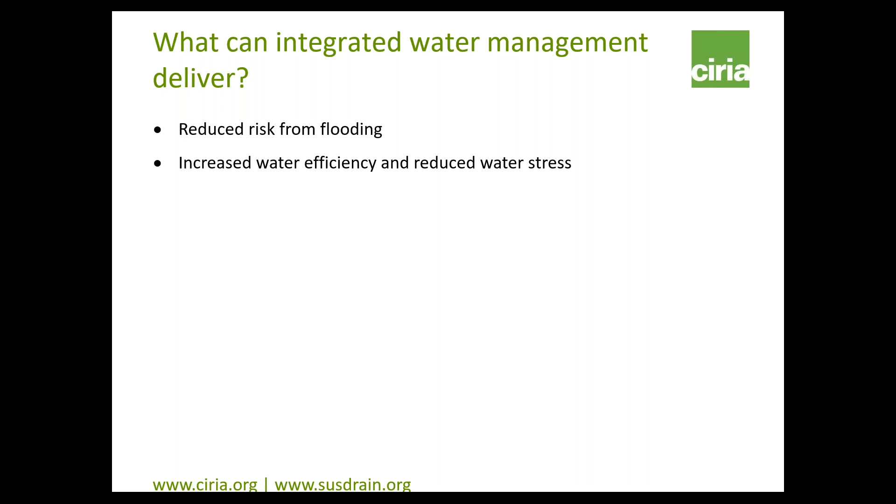It creates a clean and good quality water environment by reducing and removing pollution from surface water and providing a more natural and biodiverse water environment.

It enables new housing by providing integrated water management solutions to challenges such as flood risk, availability of water, lack of drainage capacity, and poor urban environment.

It facilitates economic growth and regeneration by improving urban environments and enabling sustainable development.

It enhances biodiversity. Integrated water management interventions can provide a more natural environment, introducing a range of habitats and species, from wetlands to wildflower meadows, at a range of scales, often in otherwise biodiversity poor urban areas.

We can create better blue-green infrastructure, providing functional and connected green space, which delivers multiple benefits and connects urban places for water, wildlife and for people.

It improves the accessibility of public spaces and places and enhances well-being, providing good quality open space which, as well as managing water, is accessible, creates more livable places, and promotes health and well-being.

Very topically, it can help us mitigate and adapt to climate change, because providing urban green space at a range of scales makes urban areas more resilient by reducing the urban heat island effect, reducing energy consumption, making better use of water, and enabling our towns and cities to better cope with more extreme weather events.

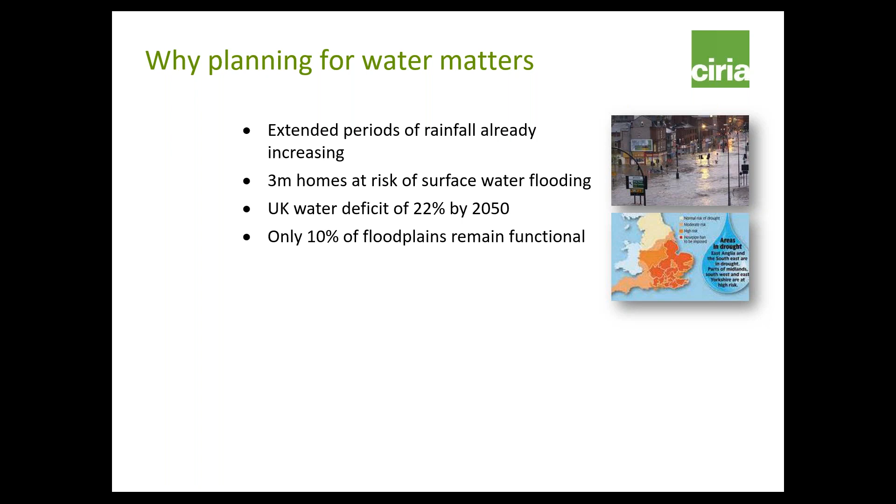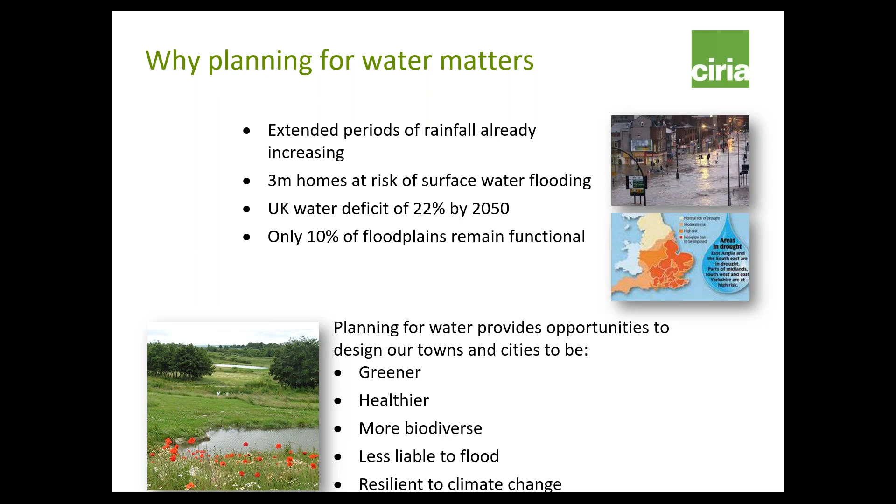It's not all doom and gloom. If we do planning for water properly, using integrated water management, we have the opportunity to design our towns and cities to be greener, healthier, more biodiverse, less liable to flood, and resilient to climate change — the 10 outcomes I mentioned before. So, how is integrated water management delivered through planning?

Planning can create blue-green infrastructure. That's the network of green space and water that permeates and connects the urban fabric to provide the elements of integrated water management and deliver the multiple benefits that it provides.

Planning can also require and facilitate sustainable drainage systems to manage surface water and collect rainwater for reuse. If planning incorporates integrated water management interventions as part of urban design and placemaking, it will provide good quality open space which, as well as managing water, is accessible and creates more livable places. This in turn attracts business and promotes economic growth.

Planning can create opportunities for rainwater harvesting and reuse to reduce demand for mains water. Incorporating integrated water management into the urban fabric creates a more pleasant and healthy environment. These measures provide recreational space and a more pleasant and healthy urban environment, promoting well-being and improved biodiversity.

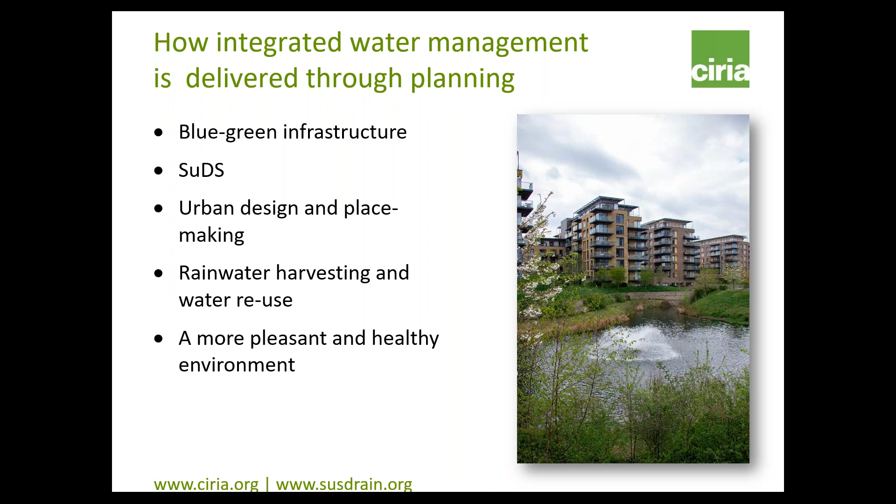I mentioned at the beginning that we identified in our research the factors which are critical to delivering successful integrated water management, and there are five of them. The first one is understanding integrated water management.

The second critical success factor is having an enabling local policy. That's clear and understandable local plan policies and clear supportive plans and strategies from the lead local flood authority and water company. The third one is early engagement.

This is early engagement with water companies, developers, lead local flood authorities and other areas of local government, but also with the local community and with a catchment partnership and other stakeholders.

The fourth is partnerships. Partnerships are really important, and this involves good links with and between local planning authorities, lead local flood authorities and water companies, with catchment partnerships and with an engaged and supportive local community. And to make partnerships successful, we need to understand the partner's interests and drivers.

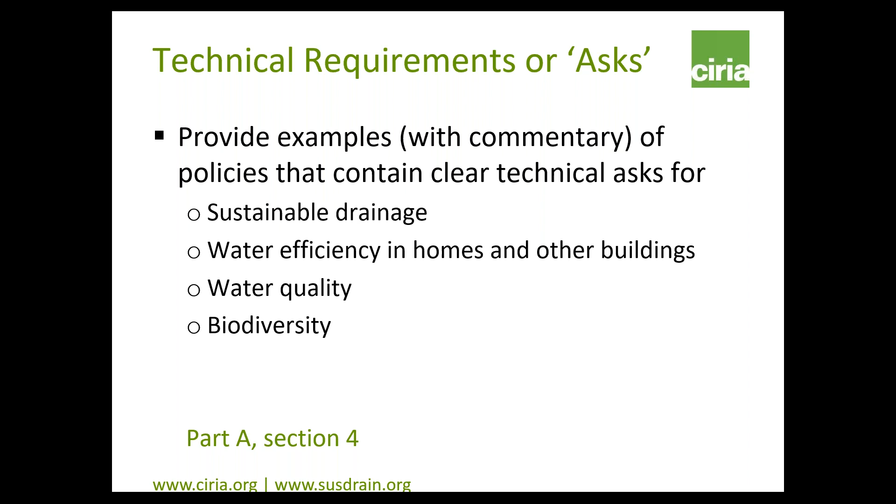We couldn't find clear technical asks for all elements of integrated water management, but we did for sustainable drainage, water efficiency, water quality and biodiversity, including ecosystem services. We hope that in the future we will be able to find technical requirements for the other elements of integrated water management.

So Part C of the guidance contains the 15 case studies of local plans, which we believe present good practice in promoting better water management planning. These emerged from our initial survey, which got a response of over 200, from the project steering group, and also from our own research emerging over the period of a year or two.

Towards the end of the process, we also heard about some emerging plans as well, which were in draft form. So we've included some examples of those in Part C as well.

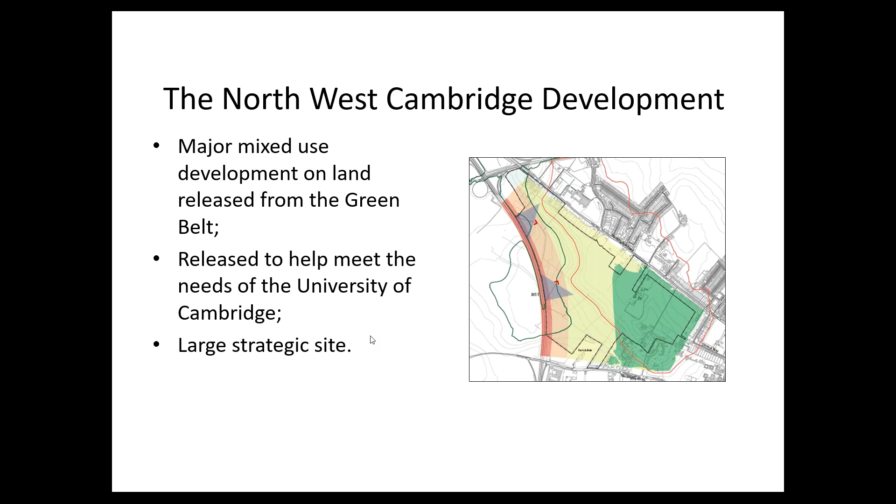This provides an overview of what the area action plan covers. As I've already mentioned, it gave us an opportunity to prepare more detailed policy guidance and to cover some areas that weren't really covered in the local plan for the whole of Cambridge.

It identified a vision and key objectives for the development, including a vision for the site to be an exemplar of sustainable living and to accommodate the impacts of our changing climate. That was reflected in the setting of specific construction standards for the site.

I'd point out this document was produced before we had the National Planning Policy Framework. Some of you may remember the old Planning Policy Statement 1 supplement on climate change - we used that, and the specific circumstances of this site, to require the whole site to be brought forward at Code for Sustainable Homes Level 5, which includes quite stringent water efficiency requirements of 80 litres per person per day.

That really was one of the driving forces behind the water sensitive urban design approach that's now being implemented on the site, which Suzanne will cover shortly.

In addition to that Code Level 5 policy requirement, we also had a specific policy in the area action plan related to the use of sustainable drainage systems, which on our next slide gives you a brief overview of what that policy includes.

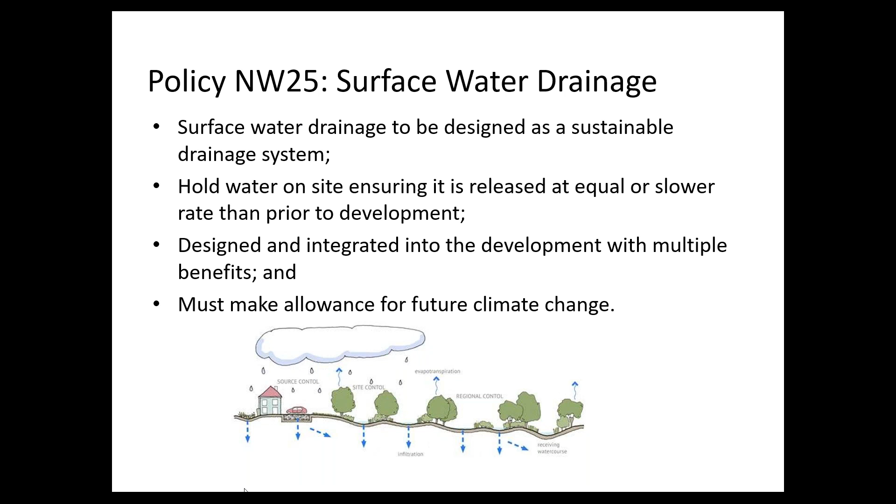As you can imagine, with any proposals for large-scale development, drainage was a key concern for residents, and we did end up having a session on the drainage policy for this site at the examination of the area action plan.

This was back when people weren't really that aware of what sustainable drainage systems were, so it was actually challenged as a suitable solution for the site. I think there were concerns that, due to a high water table in the area, sustainable drainage wasn't something that could be used on site.

So we had a bit of a challenge there, and an important lesson we learned is that you really need to promote a wide range of sustainable drainage systems and demonstrate the benefits they offer compared to a traditional drainage solution. There was also a bit of frustration at the lack of detail in the area action plan - people wanted to see a drainage design there and then, which isn't really a level of detail we would go into in a document like this.

But as I say, we had the full support of the university as a landowner on the site, and I think that was very important for us in taking this document through examination, and that policy did pass through the examination without any changes to it. I think that in part was helped by having a quite detailed evidence base.

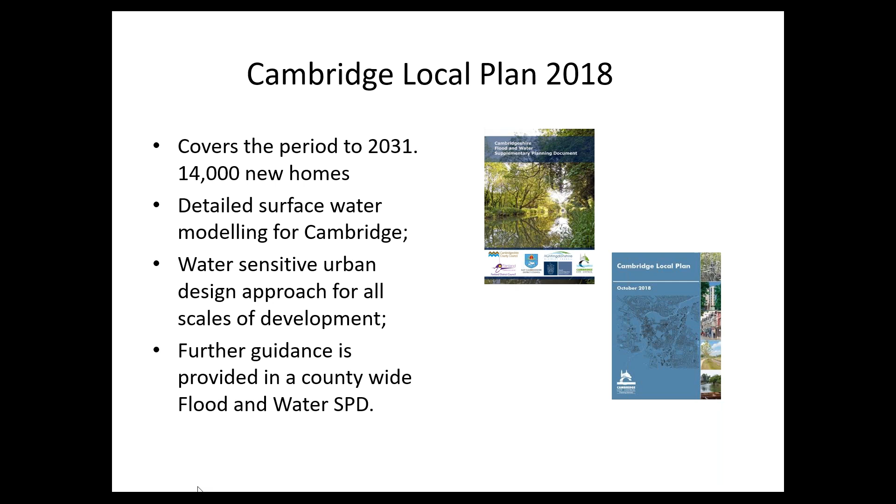And I think, moving on to my next slide, that's it from me. So just a quick whistle-stop tour of our approach to local plan policy. Great, thank you, Emma. Thank you for that presentation. Really, really helpful in terms of explaining the process, what you've done. So there is, as I said, there is an overview of the policy in the guidance.

And I suppose we've got one question, just to give a chance for other people to come in. I just wouldn't mind asking Emma. So you've got some quite strong policies there, and it sounds like you might be going for even stronger policies in the future. Are you concerned about developers' response to having your strong policy, or have they actually welcomed that in terms of providing greater certainty?

I think because we have raised this issue so many times now as part of pre-application, developers are pretty much on board with the reasons why they have to address this. Certainly some of the really big house builders that we work with are kind of used to the sorts of things that we're asking for now. And I think they realise that this is such an important issue for the area.

Both authorities have also declared climate emergencies. So I think they can see that, from a public support for development perspective, this is an issue they really do need to address. So many of them can actually see the benefits of responding to this, and just not thinking about water as something that needs to be gotten rid of as quickly as possible. I think they are seeing the benefits of integrating it into the wider green infrastructure for development, and the benefits that can bring, not just for residents, but also uplifts in costs of houses as well.

Excellent. Can you hear me? Yeah, we can hear you. It's all good. Excellent. So the next question is, can you see me?

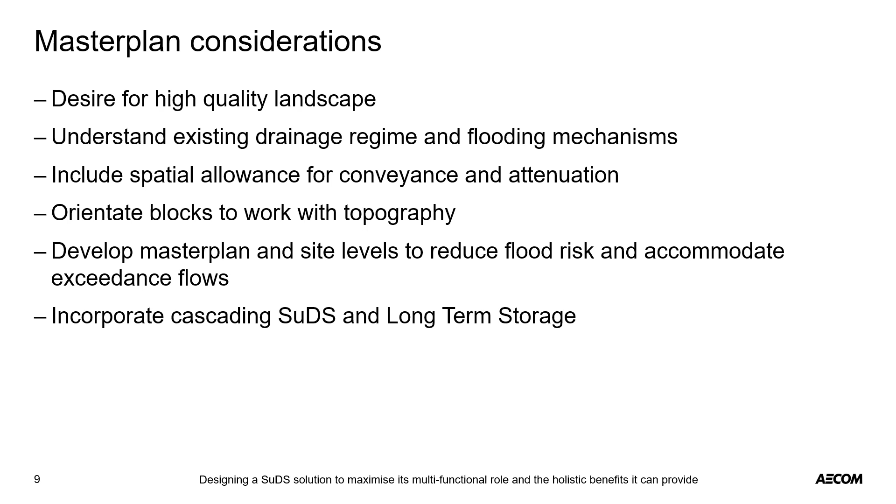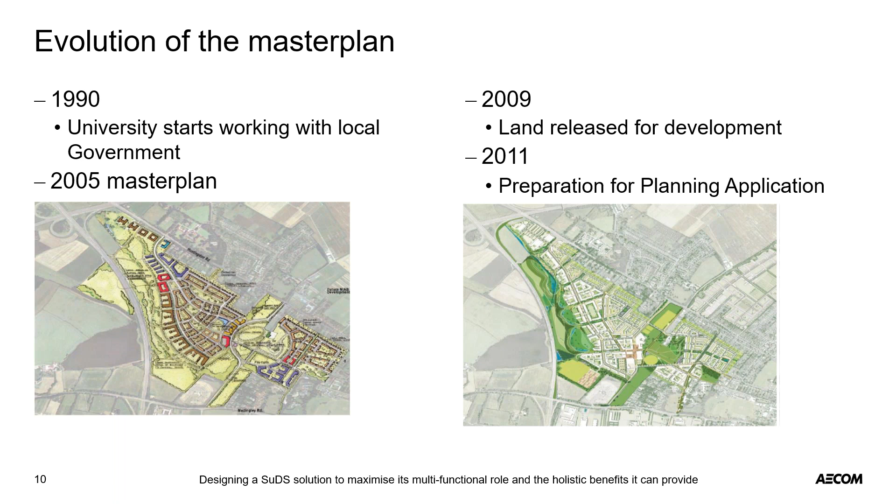The university started working with the local government in Cambridge in the early 90s. From the outset, consideration was given to how to integrate surface water management within the master plan, and each iteration included a network of green fingers and a landscape park adjacent to the motorway. The master plan evolved from 2005 to 2011 through to the formalisation of planning from 2013.

The master plan accompanying the planning application had a series of swales adjacent to the main streets and within the green fingers, ponds for attenuation, landscaping bunds, and a relief channel on the western edge as part of the Washpit Brook flood reduction scheme.

That flood reduction scheme was produced in response to feedback from residents downstream at Girton and considerations in the area action plan of local flooding issues. A minimum of two stages of treatment were available for runoff from pavement surfaces prior to discharge into the relief channel.

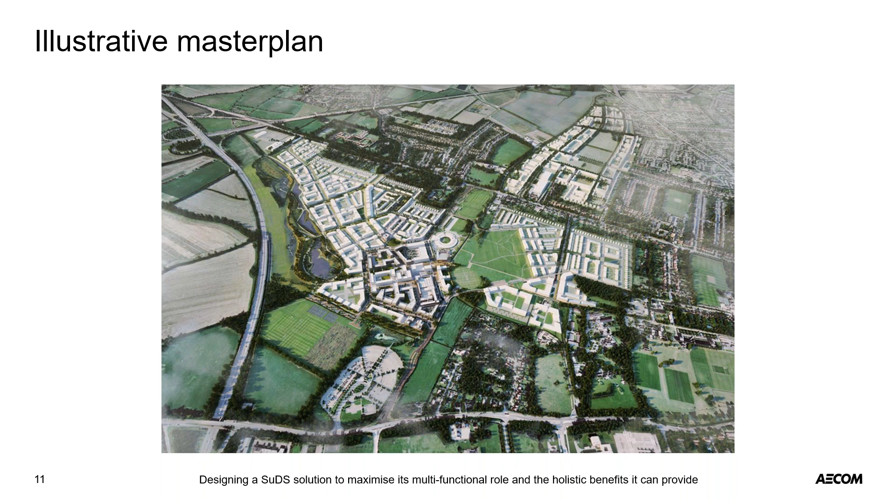The deliverables prepared to support the planning application and the discharge of various conditions created a framework for the development and delivery of the SuDS at Eddington.

The flood risk assessment and surface water drainage strategy submitted with the planning application established the principles for management of surface water at the development. In order to discharge a series of site-wide conditions, the principles in those initial documents were further developed to consider how the use of potable water could be reduced.

Then specific proposals for each part of the site were presented to the city and district councils for approval at the reserved matters stage.

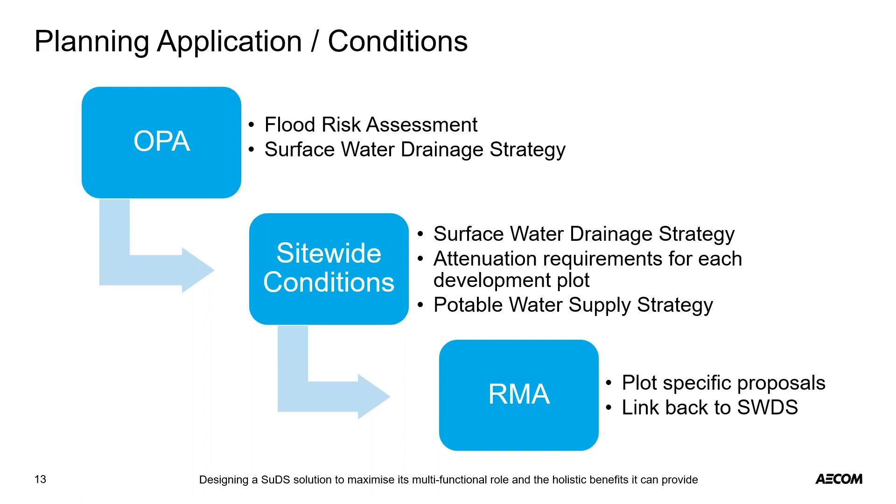The Environment Agency's flood zone map shows the site to be almost entirely in flood zone 1. But flood zone mapping hadn't been undertaken for the section of the Washpit Brook through the site, so we built a hydraulic model of the brook to assess that fluvial flood risk.

That model indicated that the majority of the site was in flood zone 1, but a small portion was located within flood zones 2 and 3 if the watercourse was unaltered.

The flood map also identified the potential for significant flooding at the confluence of the Washpit Brook and Beck Brook, which is situated approximately 2 kilometres downstream of the site.

In this section, I'll explain the considerations made during the design of the landscape corridor on the western edge of the development to create a scheme that mitigated the potential for flood risk to arise.

There was a series of constraints that informed the development of the western edge proposals. In order to respond to the area action plan and the client's brief, we needed to reduce flood risk downstream and create an amenity space.

The proposals included the creation of a 2-stage channel along the alignment of the existing watercourse, which increased the capacity of the watercourse and enabled a maintenance strip to be retained.

We also created a new relief channel closer to the development to receive flows from the attenuation lagoons and to provide additional storage downstream of a new control structure.

We included bunds in the landscaping to provide visual and acoustic screening for the development from the motorway, and to accommodate material arising from the development.

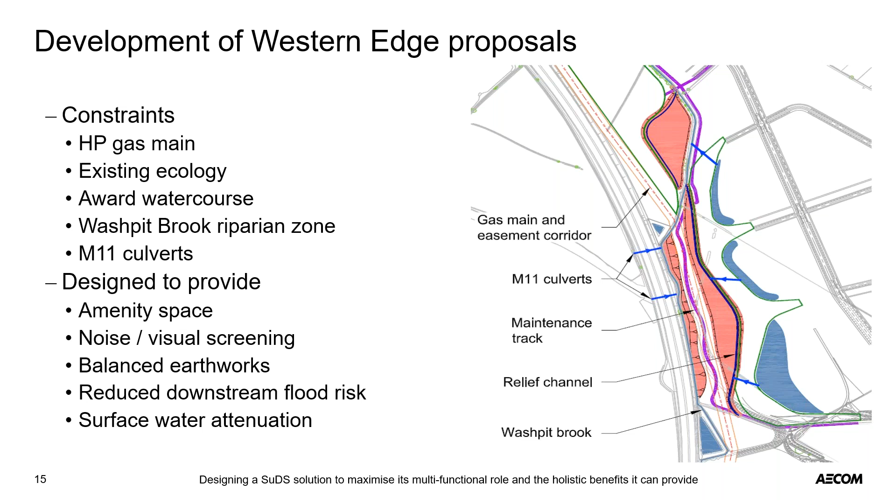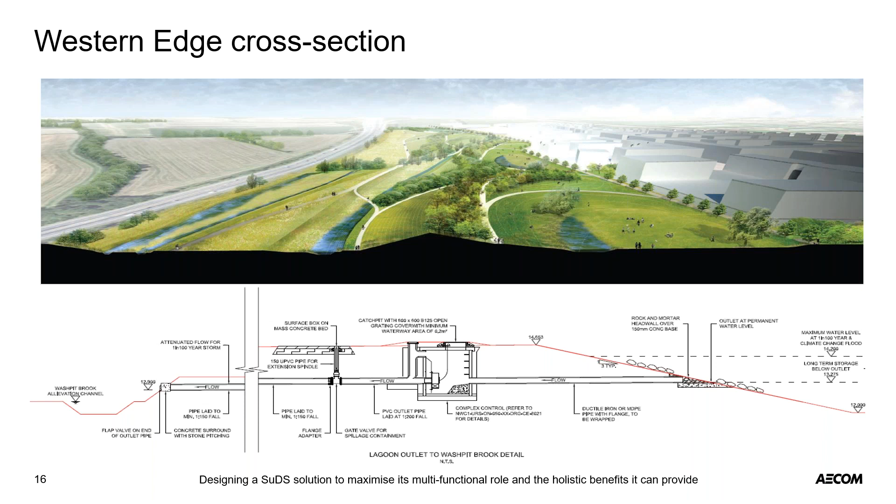I'm now going to talk about how the SuDS strategy was developed and the various forms of SuDS that have been incorporated into the proposals.

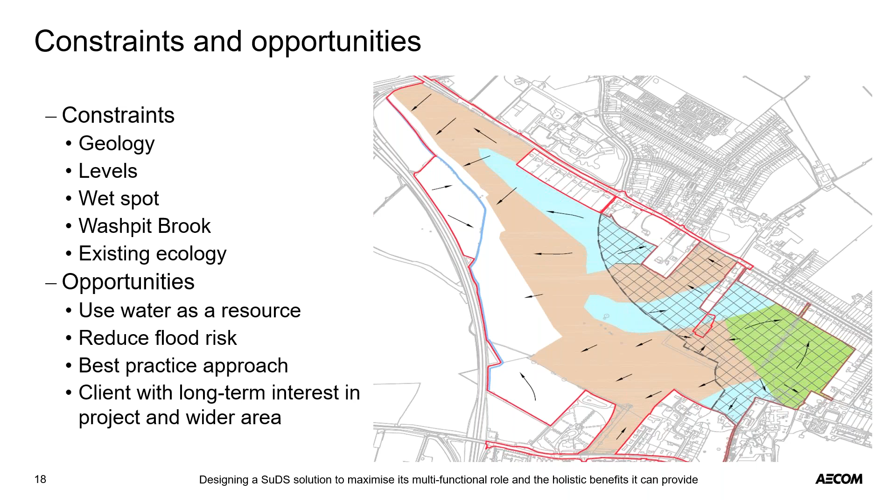Our runoff rate was limited to the existing catchment to the Washpit Brook. The increased catchment area to the east of the ridgeline enabled a significant resource of rainwater to be generated. We had the opportunity to modify the landscape to reduce flood risk downstream and to drain the wet spot area, to create a high quality environment for the university, and with our client's long-term interest in the project, to challenge traditional engineering solutions and create a best practice example.

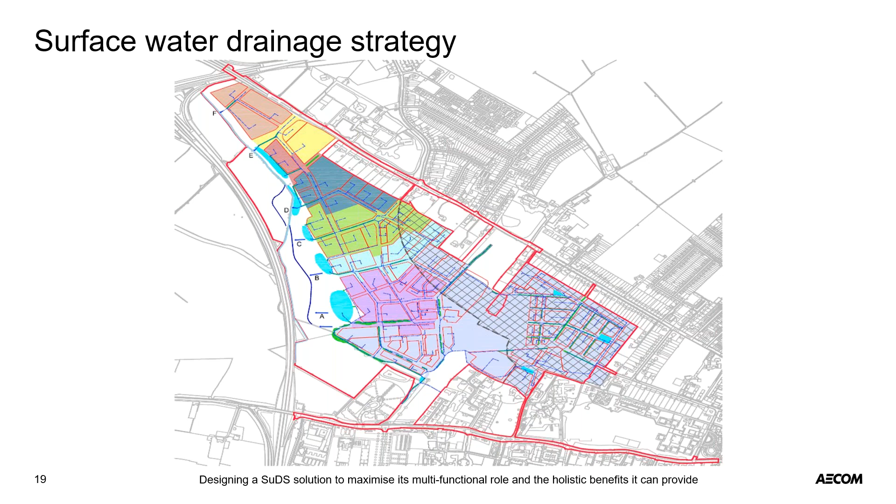The surface water drainage strategy was a comprehensive report which defined the runoff rate from each plot into 6 drainage networks at the site. The characteristics of each plot were considered: its size, underlying geology, and location in relation to the ridgeline. The illustrative master plan was reviewed to determine the likely permeable and impermeable areas.

Runoff from those areas was assigned to the networks to determine the size of swales and the subsurface pipe and manhole network. The strategy identified the likely attenuation volumes required on each plot and what forms of attenuation were likely to be suitable. It also identified the volume of attenuation and long-term storage required in each lagoon.

This document referred back to the flood risk assessment, but also set the framework for the reserved matters designs that later followed.

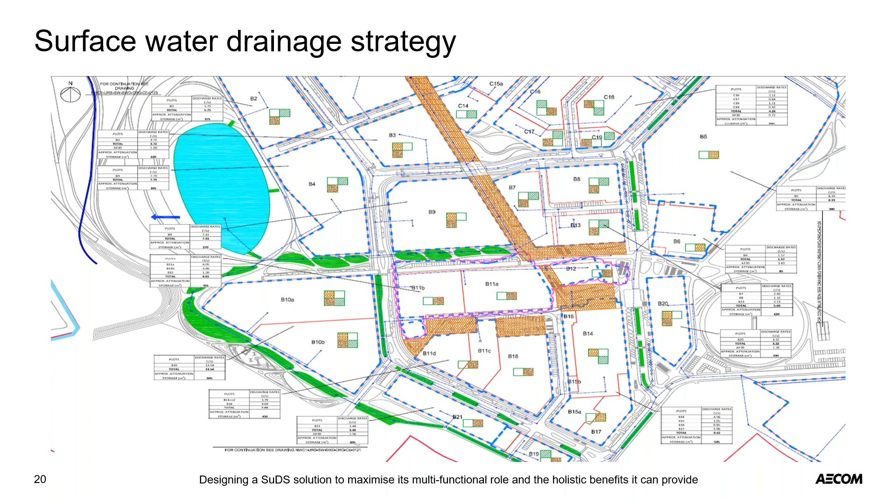We worked alongside more than 10 architects in phase 1 to promote the integration of attenuation within the landscape, developing water-sensitive urban design solutions. Maintenance aspects were considered throughout the selection of drainage features. We ensured levels were designed to consider exceedance events, and coordinated the drainage solutions with tree pit root protection zones and the university's network of underground bins.

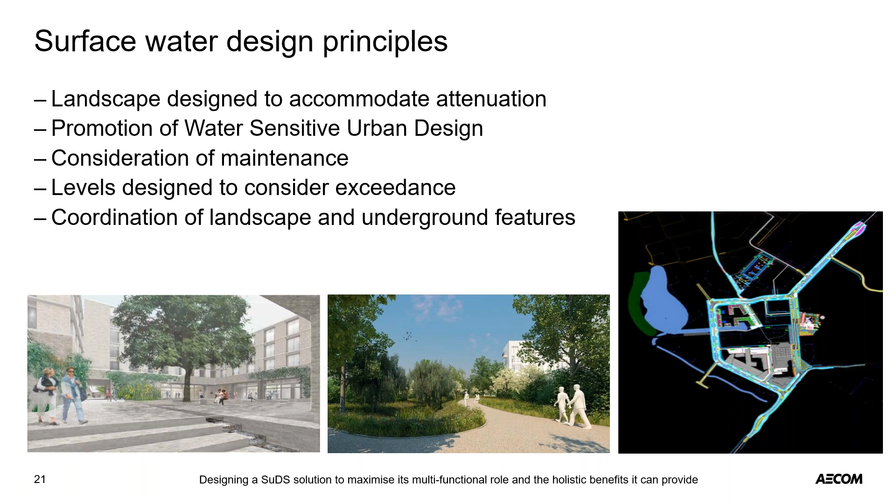We also attended many of the pre-app meetings up in Cambridge to discuss with the architects and with Simon Bunn and others how we could integrate rills, swales, permeable paving, green roofs, and various other solutions into the design proposals.

In contrast, the other streets will be retained within the university's ownership and could receive runoff from the streets and the surrounding hard landscaping. Extensive consideration of these corridors was needed to ensure sufficient space was available for the road, pedestrian and cycle facilities, the verge, landscaping, trees, swales, parking areas, refuse collection facilities, including underground bins, and the various underground utilities.

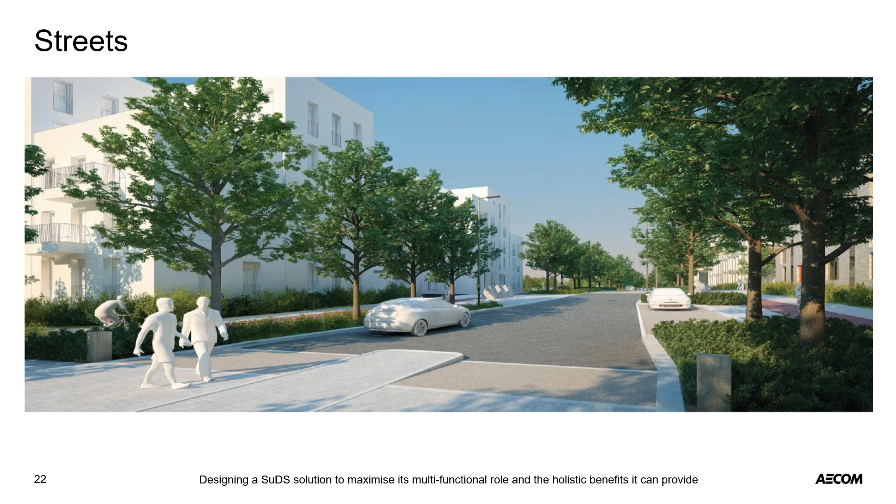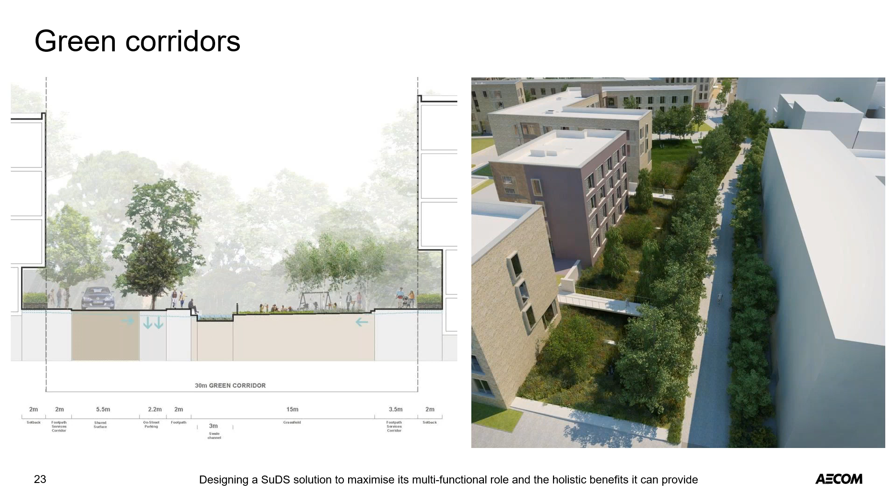As mentioned, the East of England has the lowest rainfall in the country and is classified as semi-arid. The Area Action Plan required the development to incorporate water conservation measures to reduce potable water consumption. To meet Code Level 5, we needed to reduce daily use of potable water from 150 litres per head per day to 80 litres per head per day.

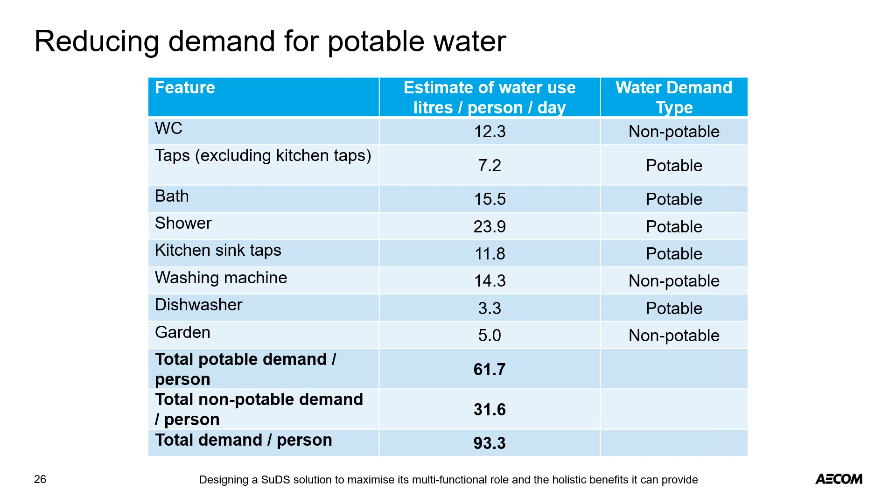The university's team reviewed a series of options to reduce potable water use. They considered plot-based rainwater or greywater recycling, site-wide wastewater recycling to a non-potable standard, site-wide surface water recycling to a non-potable standard, a combination of wastewater and surface water recycling, in addition to the use of water-saving devices. Consideration was also given to whether these facilities should be installed to each dwelling, to a group of properties, or on a site-wide basis.

The university chose to use a site-wide rainwater recycling facility. Rainfall would discharge from each plot into the site-wide network, pass through swales in the green fingers, before being intercepted, treated, and returned to each plot as non-potable water, and outfall to the river would be maintained at greenfield rates. Each plot would also be connected to the incoming potable water main, whilst foul water would continue to discharge to the foul water network. This process ensured that all properties would be connected to the non-potable water network and would satisfy the credits for code and BREEAM.

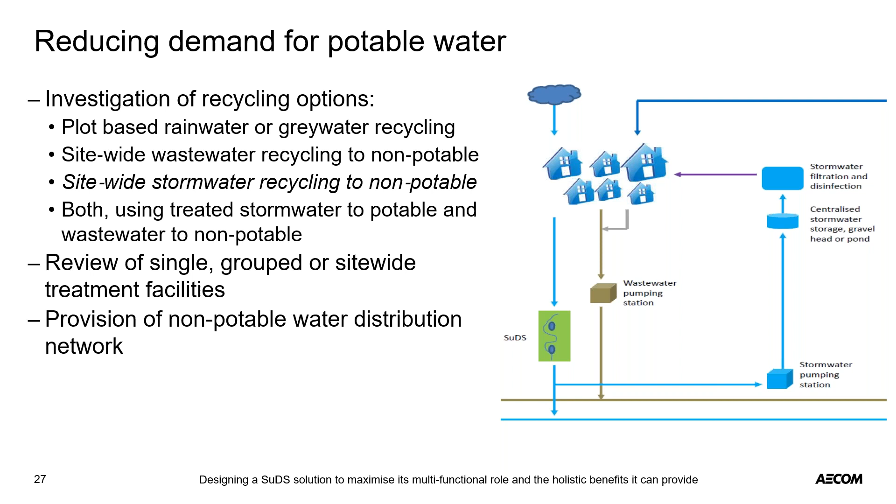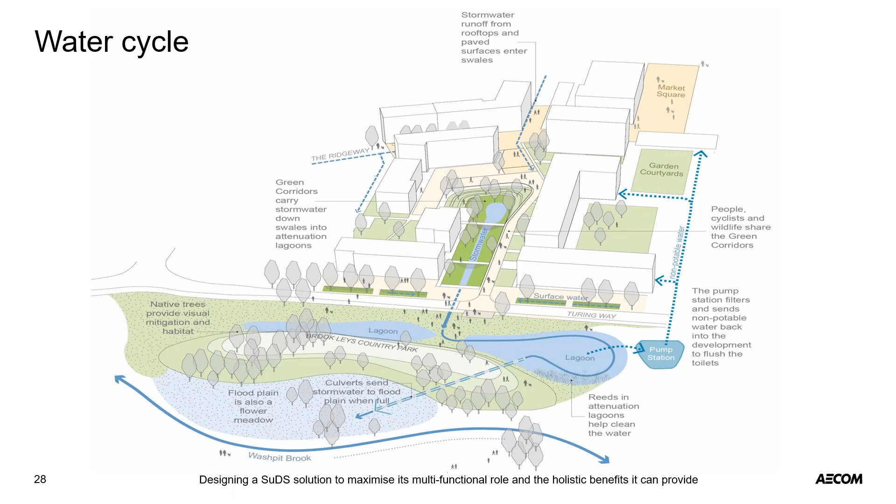This image shows how the principles from the figure on the last slide work at a local level. In the centre of the image is one of the green corridors. The swale in the green corridor forms part of the drainage network and conveys and treats the surface water runoff. Runoff also enters the swale from the adjacent street. The swale discharges into the lagoon, from where water is collected, treated, and pumped back to properties as non-potable water. The treatment includes reed bed filters, ultraviolet light, and chlorination. Once the lower part of the lagoon that supplies the non-potable water system is full, surface water is discharged to the Washpit Brook. Cambridge Water designed and adopted the treatment plant and the non-potable water network.

With the use of potable and non-potable water and the incorporation of water-efficient devices, the savings could be 750,000 litres of potable water per day for a population of 8,500 people.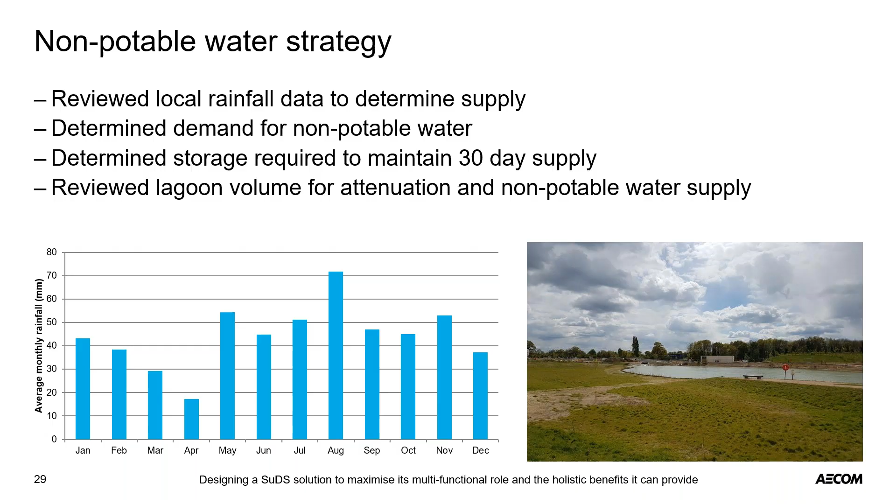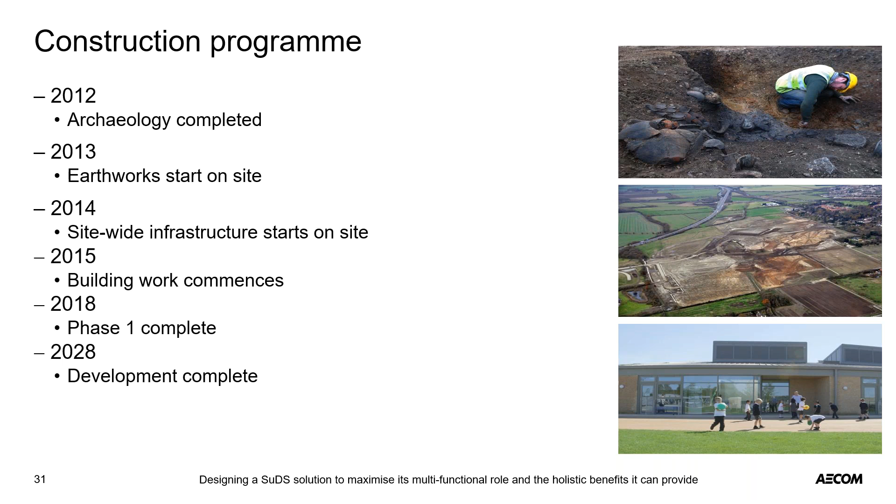So what stage has the project reached? The archaeology was completed quite early on. Building began in 2015 with the school opening in 2016, and phase one is now largely complete. But the development will keep going through to 2028, and phase two is now currently in the design process.

One of the commitments made in the non-potable water supply strategy was to construct the lagoon at an early stage in order that the lower part could fill up before any water was extracted from it. In response to planning policy and comments from the EA and City Council, commitments were given that the main surface water drainage infrastructure would be constructed in advance of any discharge being permitted from a plot into the network, in order to provide that plot with a drained outfall to the brook.

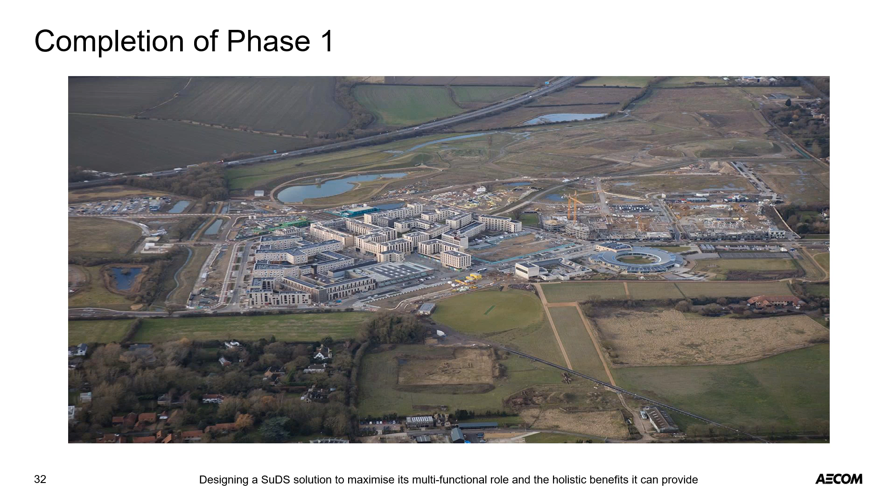Runoff from each plot would be restricted to the rates specified in the drainage strategy during construction. The construction of the Washpit Brook Relief Channel and the main phase one drainage network and retention lagoon would take place as part of the very first works of the development, to ensure that pollution control, protection, and attenuation provision was in place during the construction of phase one. This photo shows how those commitments were delivered.

Through the completion of phase one, the university has constructed green corridors, attenuation lagoons, a flood attenuation scheme, a water treatment plant, and the provision of both potable and non-potable water connections to every property in the development so far. They have achieved a reduction in the use of potable water and a reduction in downstream flood risk, and have created an attractive environment with a landscape park that offers multi-use amenities.

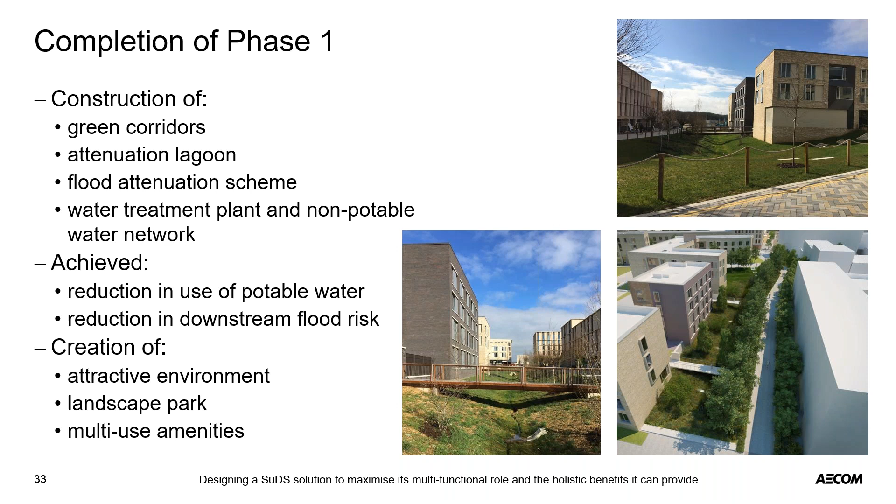So what have we learned from this project? One solution can have multiple benefits.

Constraints can be redesigned to provide a series of opportunities. Sustainable and green solutions, such as swales and treatment lagoons, can be easier to build and maintain than mechanical engineering solutions, and bring aesthetic benefits with them.

Rainwater is a resource that has the potential to become increasingly scarce. It should therefore be looked after and reused wherever possible.

We are proud to have been involved in such a landmark project and are now sharing some of the best practice designs supported by the university with other clients. Thank you.